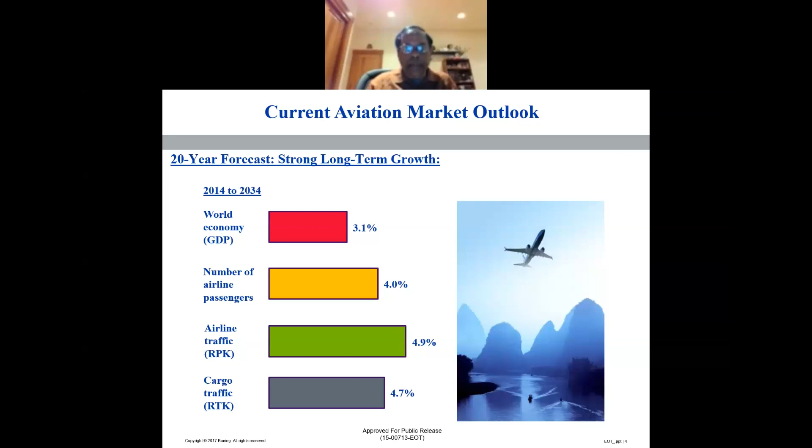So what do the market trends look like? The market trends basically are driven by the growth of emerging economies. You know, the current economy is not that strong, and because of that, you have seen how the airline industry was affected during the pandemic and is now gradually, slowly recovering. It is also a much more diverse and balanced market all over the world, like different countries have different requirements based on their own country's passenger demands.

And there also continue to be strong replacements when the aircraft are becoming too old. It's time to replace the aircraft, and then there are the new airplane capabilities, say for example, our 787-8, 9, and 10, and the new airplane that is coming, called the 777-8, 9, is coming maybe in 2024 that all the passengers will be flying. So this plane is under testing at this moment.

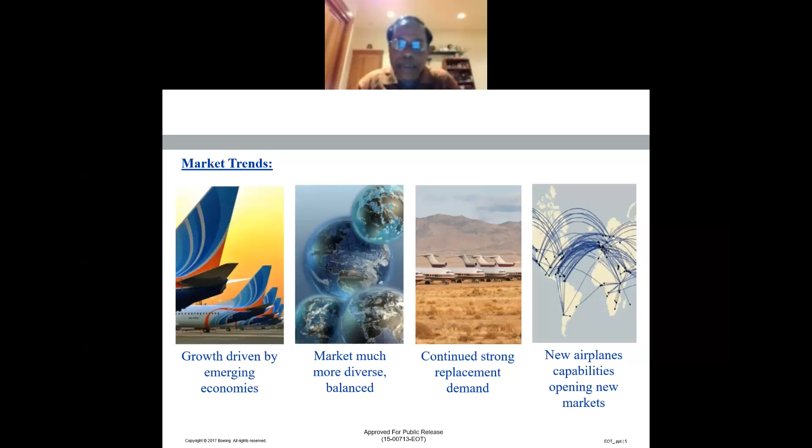So how does the fleet composition change in the next 20 years? As you could see from the pie chart from left to right, the regional jet is changing from 12 to 6%. Single aisle aircraft, as an example the 737 is the most popular, is moving from 65 to 70%. The small wide body is the 767 and also the 787 has some. The 787-8 is a small wide body that is moving from 11 to 13%, and the medium wide body is moving from 8 to 9%, and the very large aircraft like the Airbus A380 or our 747 is moving from 3 to 2%. So that's the next 20 years trend that has been forecast.

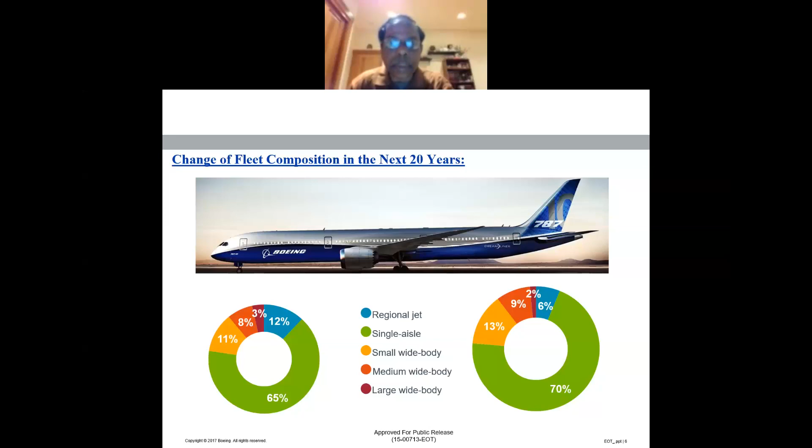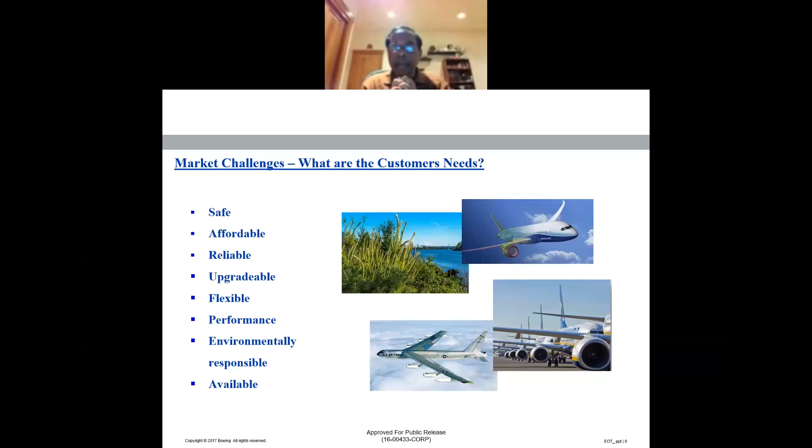So what are the technology and investment for future needs? So we are looking for extreme affordability, breakthrough performance, enduring sustainability, and being environmentally responsible. So that's the main focus of technology investments for the future.

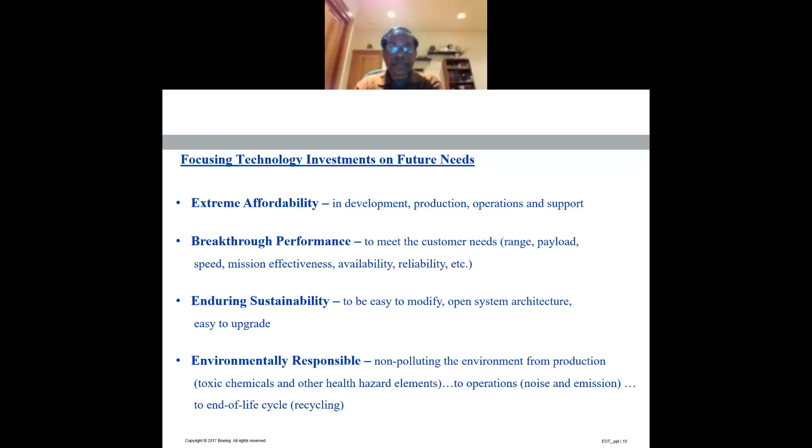So in this diagram, I'm going to show you what the major structural components look like. Those are all external shapes, like your fuselage, the body, the wing, and the stabilizers. And there are some under the undercarriage, there is a keel beam and the landing gear. Those are internally installed inside the aircraft. And on the wing, there's an engine and nacelle and pylon. And so those are the major components like your fuselage, wing, and stabilizer.

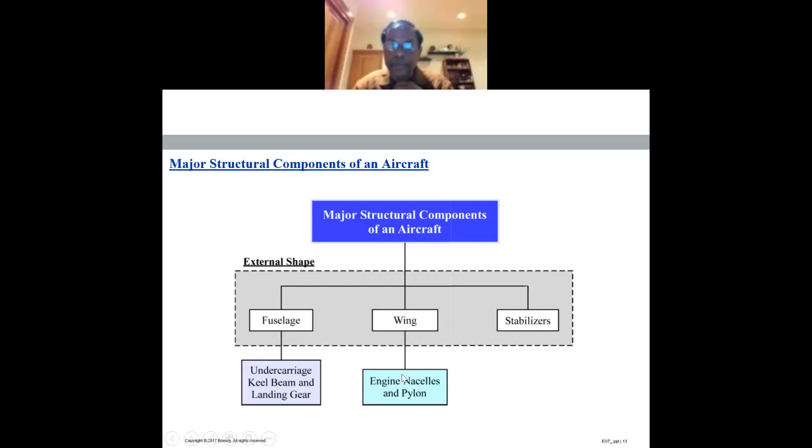So now I'm moving to the structural part of the fuselage section. As you could see on figure C, there's an example of an upper lobe of a section of a fuselage. So fuselage has three major components, like your skin, that's the skin, that's the stringers, which go along the length of the aircraft. The frame is a transverse component. As you could see, those are the frames.

And what are the input metals to manufacture those? The skin is made out of sheet or plate products, either bare aluminum or clad. The stringers are made out of sheet as well as extruded product. The frame is also made out of sheet product, like a plain sheet, then you form it into the shape and then you make the frame out of it. It could also be an extrusion product.

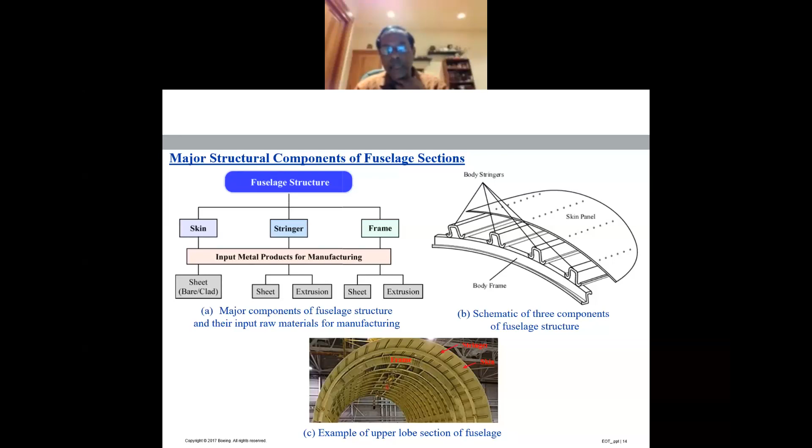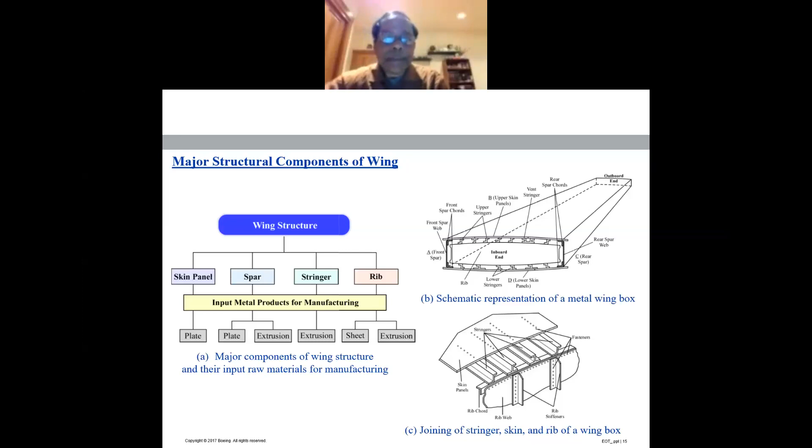So the major structural components for the wing are very similar. It has skin panels. As you could see, the upper part of the wing when you were flying in the aircraft, that is called the skin. Then the spars, this spar is called the front spar. In the back there is a rear spar. Let me see if I could minimize that one. So that's the rear spar and the front spar. And the stringers are going along the length of the wing. There is this called the rib, like our human body, we have ribs in our chest.

And then the input materials: the skins are made out of plate, spars are made out of plate and extrusions, stringers are made out of extrusions, and ribs are made out of sheet and extrusions. So those are the basic components of various aircraft parts as well as the raw materials used to make those components.

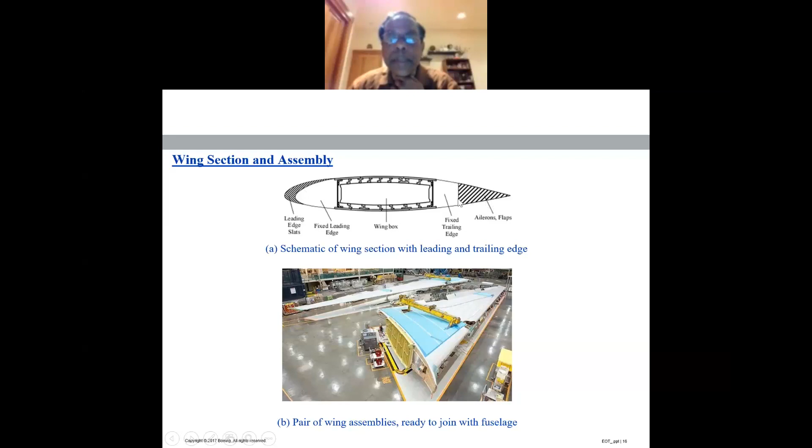Okay, so this slide is showing you a wing section assembly. As you could see, the top view shows the major components. The leading edge of this is called the slats, and this is called the leading edge. This is the trailing edge, and the main structural part of the wing is sitting in the middle. And so it has a fixed trailing edge and a movable trailing edge. And the bottom photograph is showing you the actual wing that will be attached to the fuselage later for a 777 aircraft. So ready to join.

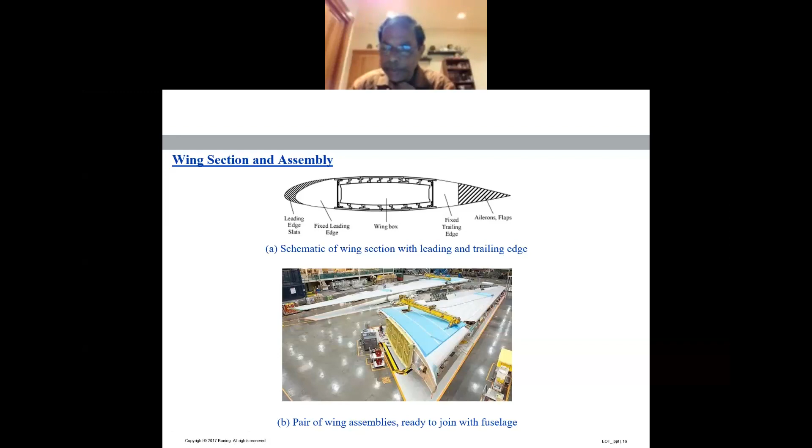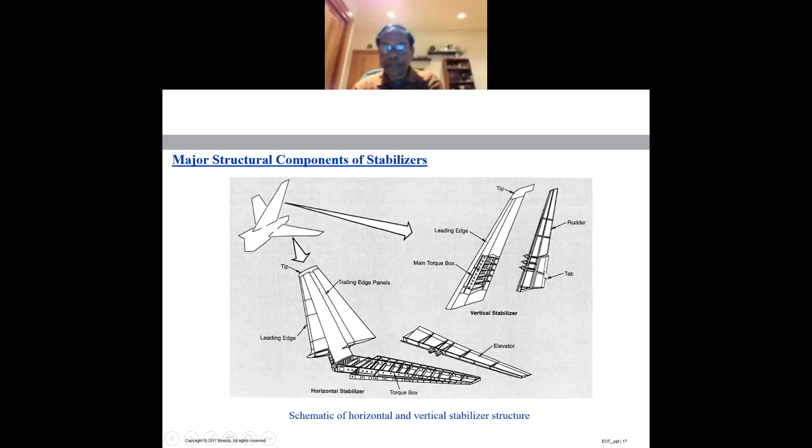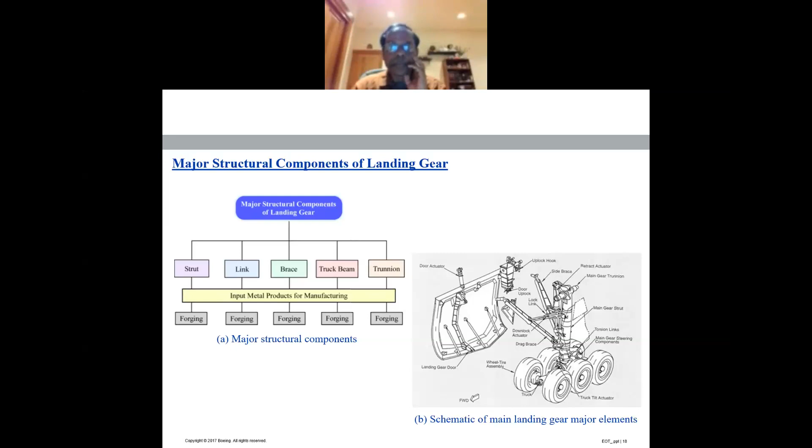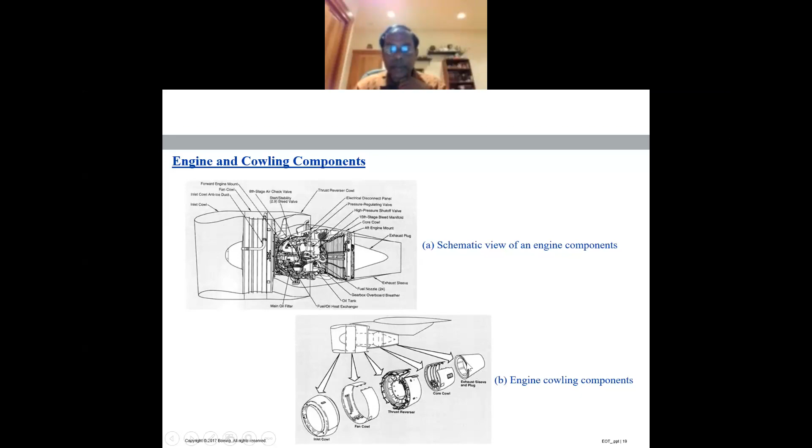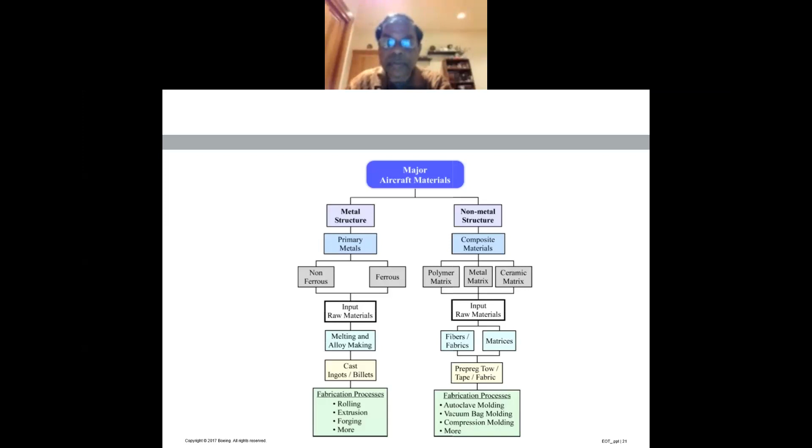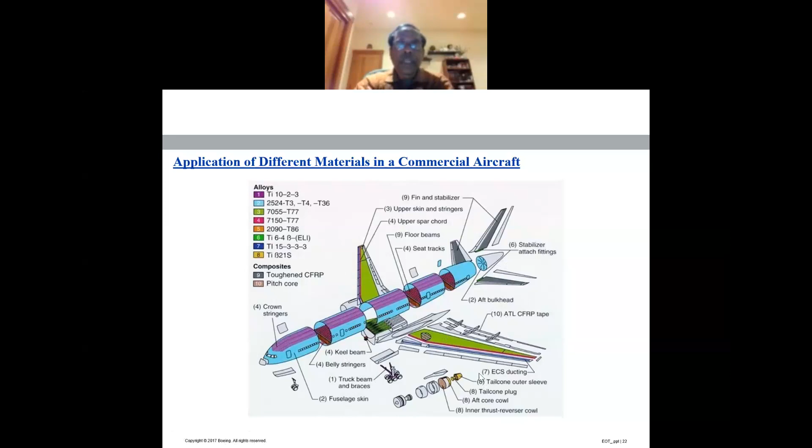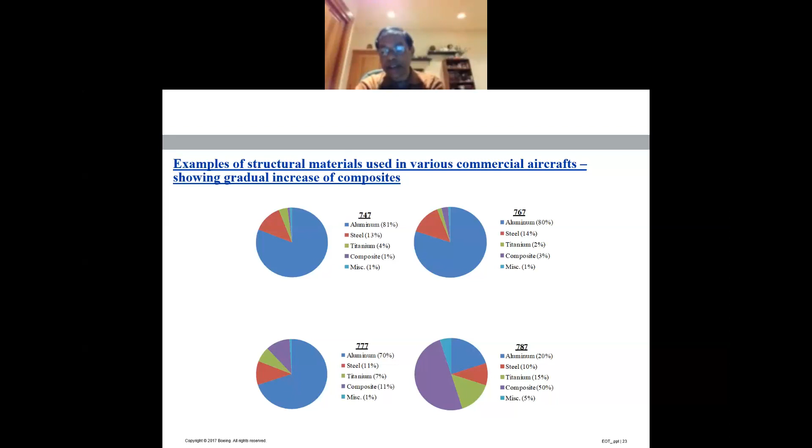Here is a pie chart example for military aircraft. For the F/A-18, composite was 10%. For the F/A-18E and F, composite was 19%. For the F-22, composite was 24%. Since composite is growing, titanium is growing too, because titanium is compatible with composite material. And when the F-35 came in, you can see composite increased to 40%.

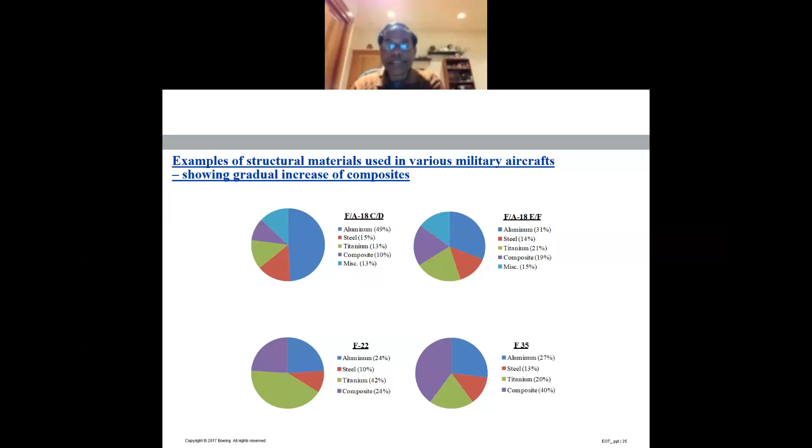Now I'm going to show you the uses of different materials, the wrought products: sheet or plate, extrusions, forging, and what percentage is used in the aircraft. As you can see on the top pie chart, 48% of the total material used is sheet and plate product, 24% is extruded product, 15% forging, and 13% other materials. The bottom figures show the fundamentals of rolling and sheet production, extrusion, and the forging process.

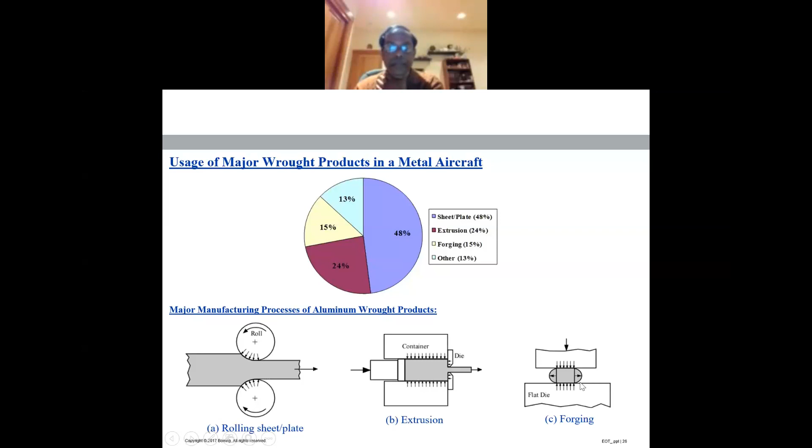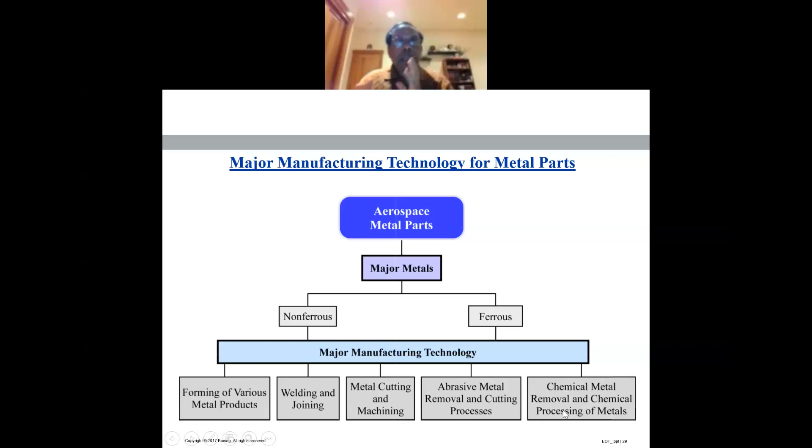So I'm going to show you just one quick slide on this one, that tribology is one of my research fields. My PhD work was on tribology, meaning friction, wear, and lubrication processes. Tribology's major components involve the rubbing between two metals, two surfaces.

So it deals with the surface topography, it deals with the friction and lubrication process between tool and workpiece, and during the friction and sliding process, the metals go into some wear process by abrasive wear or adhesive wear, and how the role of tribology is affecting our different processes.

Like your metal forming process is a friction control process. In welding technology, some welding technologies are friction stir welding or linear friction welding. Then in machining, there is frictional heat control, and in abrasive metal removal, a lot of things are done by the abrasive process, the abrasive materials and abrasive wheels that you are using to remove the materials.

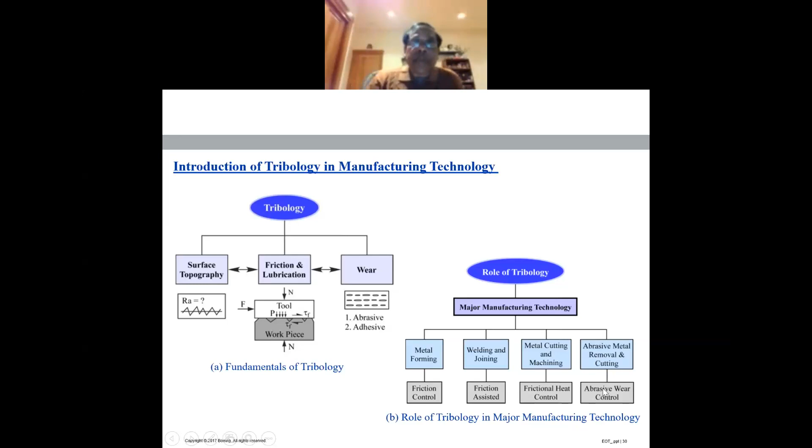So under the forming technology of various metals, there are different forming technologies. On the left-hand side, this figure is forming technology for sheet metal products. The sheet metal forming technologies are brake forming, bump forming, roll bending, stretch forming, hydropress forming, roll forming, joggle forming, deep draw hydroforming, match die forming, spin forming.

When I was in my master's program at Shibpur B.E. College, Professor Ranjit Ghosh was my professor teaching metal forming classes, and that is one of the most interesting areas. I learned it at B.E. College, and I'm still using it at the Boeing company. I'm basically a forming technology guy in the company, helping the company move forward in forming technology.

So now I'm moving to cold forming of the plate product. For plate products, bump forming technology is being used, shot peen forming technology, I'll talk about that a little bit, and laser shock peening technology is also being used to form the metal. Then on the extrusion side, there are stretch forming, roll contouring, and joggle forming.

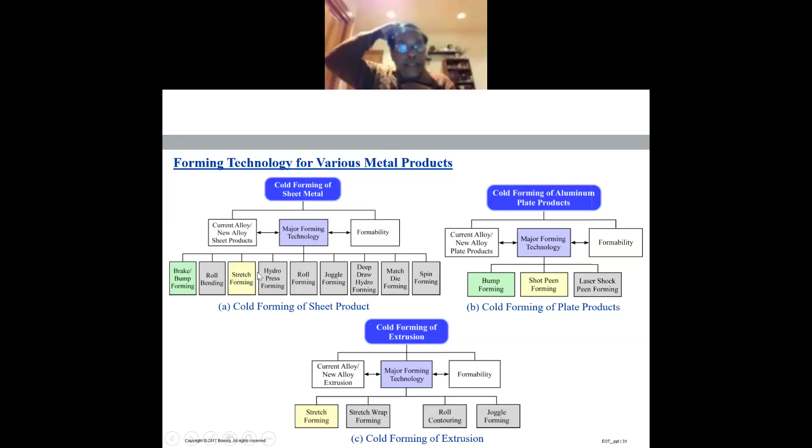Now moving to stretch forming. The left-hand figure shows a schematic of the fundamentals. Basically, there is a forming block, and a flat sheet is stretched by uniform tension by the hydraulic cylinders from left to right. The forming block moves up, bending the sheet and stretching it further beyond the yield point into plastic deformation. That's the fundamental of stretch forming.

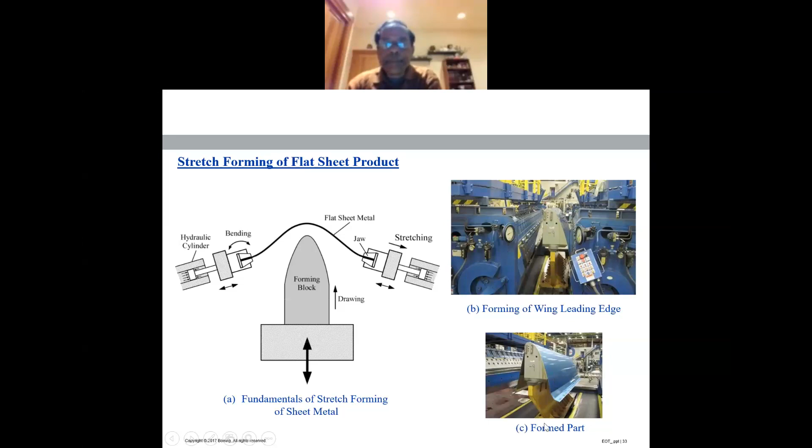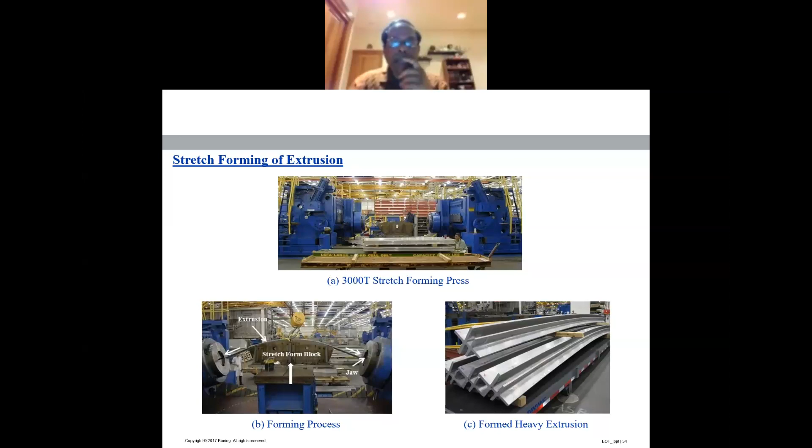So now I'm moving on. We talked so far about forming at ambient temperature, room temperature, which we call cold forming. Now I'm moving to the hot forming process. There are a few hot forming technologies being used: superplastic forming, hot die forming, hot brake forming, and hot stretch forming.

Under superplastic forming there's another process called diffusion bonding, where parts are diffusion bonded together, and then that sandwich diffusion bonded part is superplastically formed. There's also another forming process called creep age forming, where the material is brought to the aging temperature, and under that temperature some pressure is applied - either by vacuum bag or by an external applied load - and under the aging temperature the material is formed or straightened.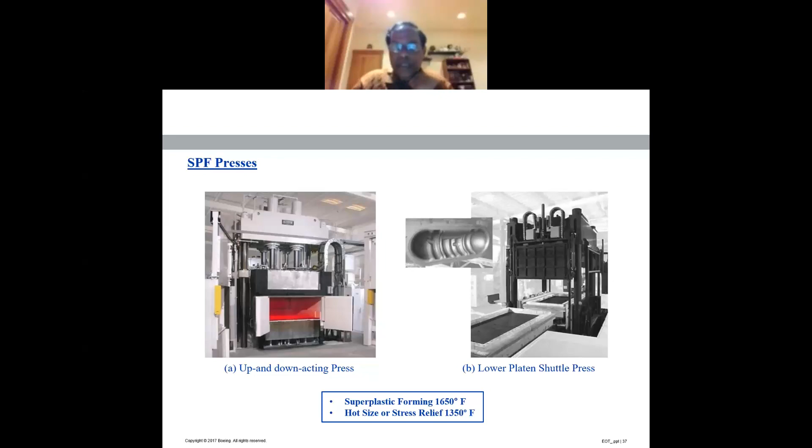After forming you need stress relieving operations to remove all internal stresses developed - the stress relieving temperature is typically 1350 degrees Fahrenheit. Here are a few examples of superplastic formed parts, 6-4 titanium sheet metal parts.

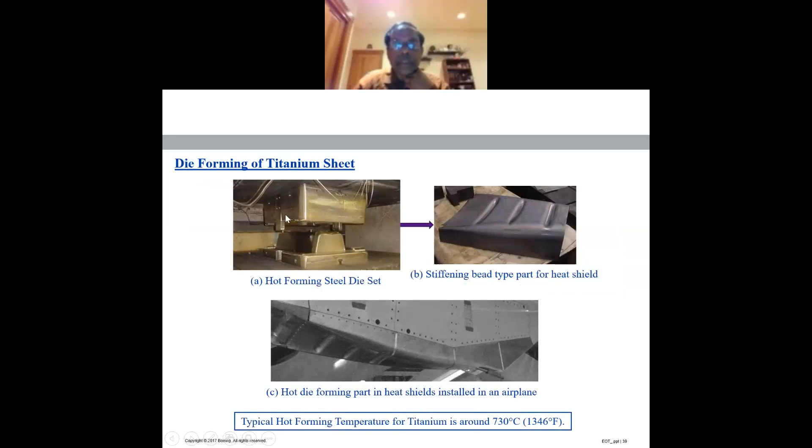As I mentioned, hot die forming is also another hot forming operation. That's a pretty heavy top and bottom die. Here's an example of the hot die forming process.

This is also a part of the heat shield components, as you can see here - I think it's for the 757, a very old aircraft. Typical hot forming temperature for titanium is 730 degrees centigrade, 1346 degrees Fahrenheit.

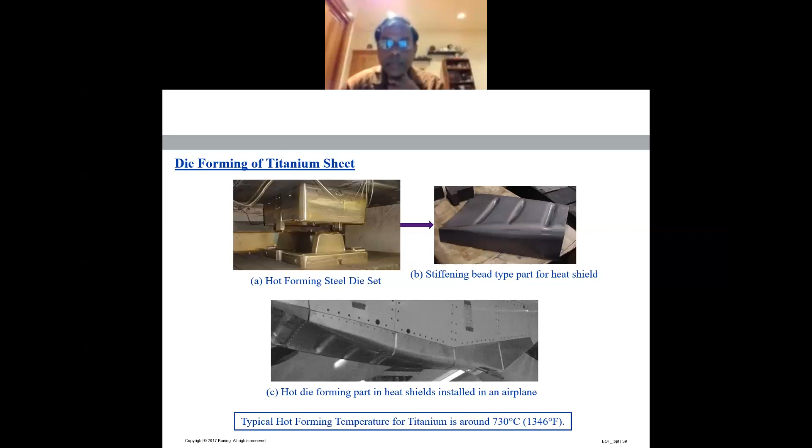So that's hot forming of a very heavy, thick plate. As you can see, this example is very hard to form if you don't use the hot forming process. It's titanium using a ceramic die, a low expense die. Since you're not making many plates of this form - this plate is for one of the military applications, and not many parts are produced - a ceramic die would be a less expensive process to use.

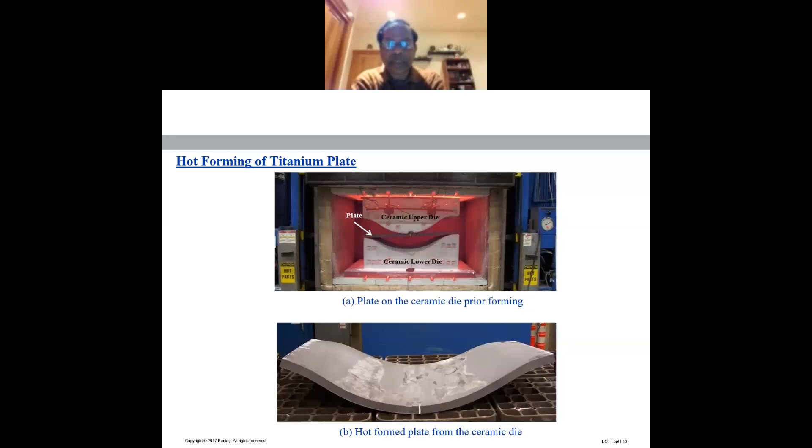Now moving to another technology called high energy forming and joining. There are two kinds of high energy forming. One is called explosive forming - these days we change the name to high energy hydroforming. And there's another technology called electromagnetic forming.

This is a schematic diagram showing the explosive forming. There's a die, and this is your blank. This is put in a vacuum bag and put into the water tank. The explosive is on top. That's the standoff distance between the explosive and the top of the metal surface. Then the explosive is ignited, and when ignited, it energizes the hydraulics, meaning the water, and the high energy hydraulic fluid pushes the metal. It's a very high strain rate deformation process, and it forms very fast and quickly to the curvature and contour of the die.

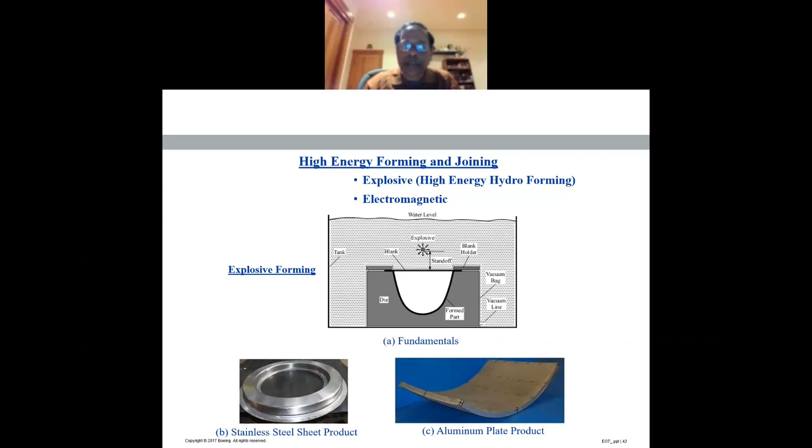So let me talk about electromagnetic forming. This is one of my very favorite technologies that I learned and applied, and I have done a lot of innovations in this technology for many aircraft.

This is an example I'm showing you where torque tubes are being used. The torque tubes drive the leading edge of the wing slat and the trailing edge of the wing flaps. When the airplane is taking off, you're extending the flap, and also when it's landing, you're extending the flap further out, and you're also changing the angle of the leading edge. So how do you do that? You need to use some torsional tube to drive the flaps.

When you make the torsional tubes, those are made by joining a hollow, seamless tube. Those are extruded drawn tubes, aluminum 2024, attached to the end fitting at the end like this, and that is formed by electromagnetic forming. This is a schematic diagram of electromagnetic forming.

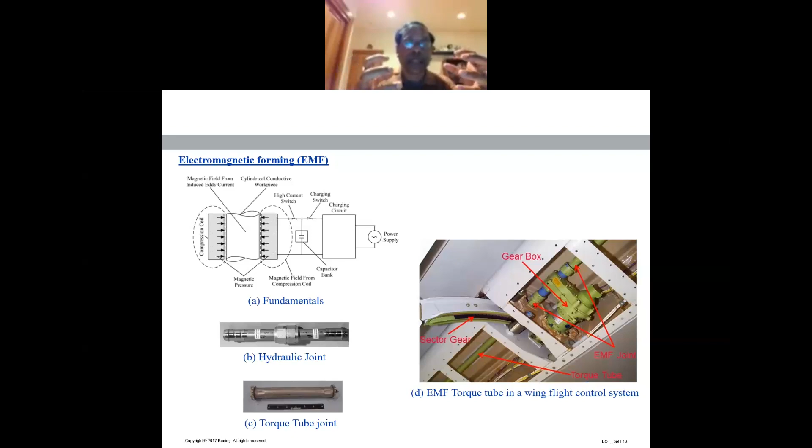Basically you have the magnetic coil, with the workpiece in between. When you discharge the current, eddy currents are induced, and because of that eddy current, two different directions of forces come in - there's a huge amount of compressive force coming in to collapse the tube into the end fitting to form the part.

So what are the applications, and what forming technologies are being used? There are bending processes, forming processes, swaging processes, and some transition forming processes. Under bending, there's stretching, draw press, compression, and roll forming. There's bulge forming, pull-out process, and beading technology. Under swaging, there's axial swaging, radial swaging, roller swaging, and elastomeric processes. There are various technologies - here are a few examples.

That's an example of bulge forming. Basically you apply some internal hydraulic pressure and localize it into the die, put some die in front of it, and do some bulge forming. There's another axial bulge formed part. There's an example of a rotary swage part over here, and the top view shows the bending of different tubes, which are finally joined by welding technology.

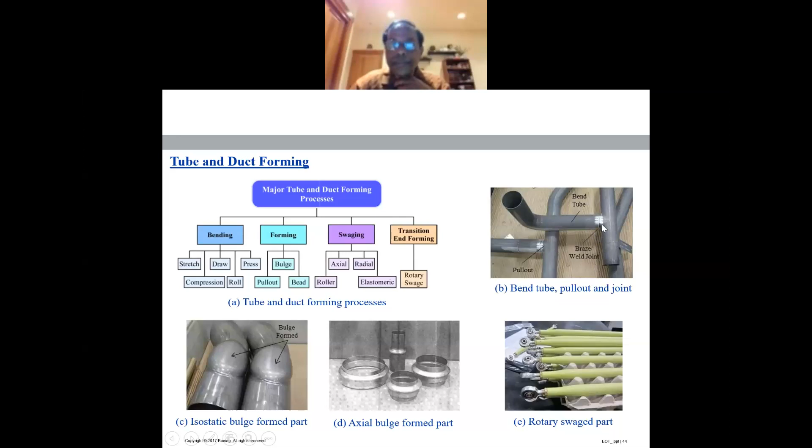Now let's move to welding technology. We have a few examples of welding - not that many welded parts are being used. Some welding technologies are used during the fabrication process, and afterward the welded section is removed and cut out to finish the part.

Friction assisted welding, as I mentioned earlier, includes linear friction, rotary friction, and friction stir welding. There are also standard welding processes done by electron beam, laser technology, TIG process, and MIG welding process.

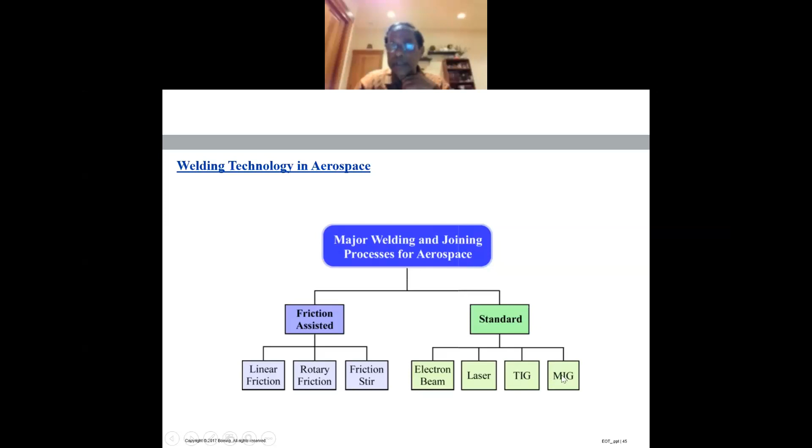That's a fundamental of rotary friction welding. As you can see, the part is rotating with very high speed, and while it is rotating, you are applying pressure, joining together under the pressure and the heat generated to bring the metal into the fusion stage.

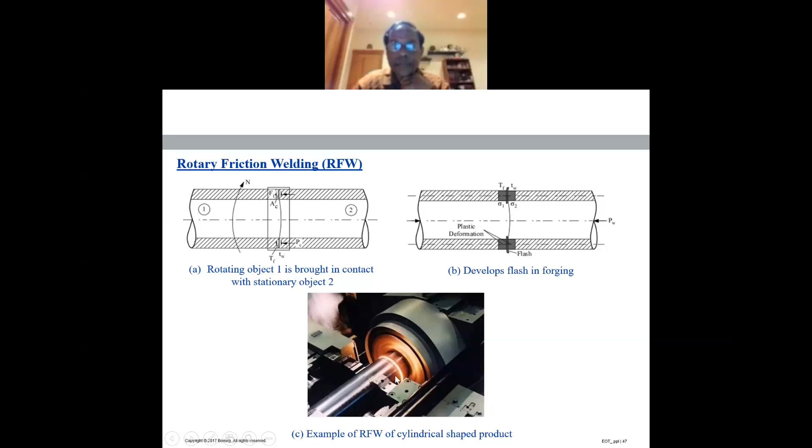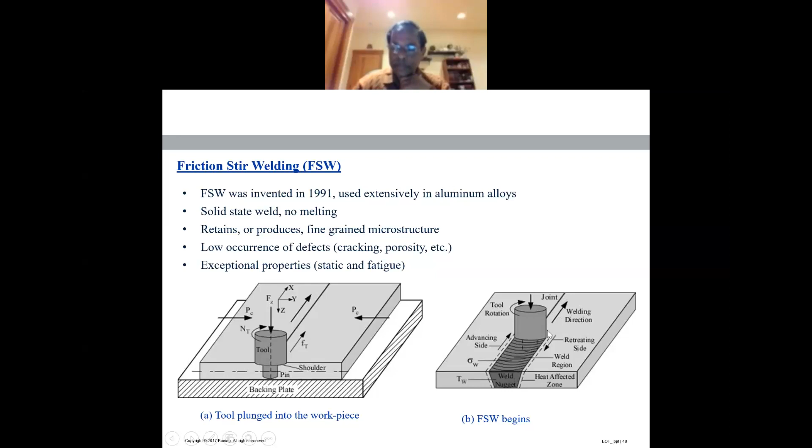So here's an example of a friction stir weld. As you can see, there is a friction stir weld joint in between this part. This part is not a structural part. We can easily apply this to aircraft for some container type applications.

Some fuel dams are also being used this way. There is no harm in having a friction stir weld joint in between.

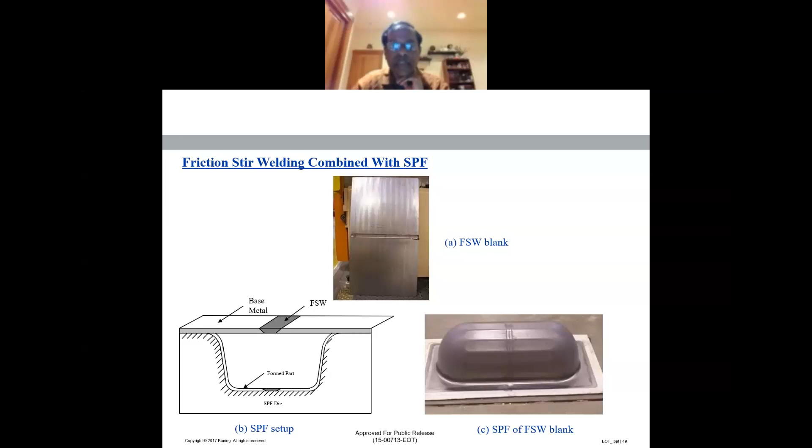But some of the parts are like this part I'm showing you, that I was involved in this lip skin development many years ago. This is the 787 lip skin. We were trying to develop it with titanium, although it was not used in the aircraft, but the technology is still valid for some future applications.

So when we did that, we had to prepare the blank before doing the plastic forming. We had to join a two-sheet blank by friction stir welding.

There are some welding joints over here, and I think there are 4 joints. The 4 joints will be split into 4 parts and finally fastened together as an engine lip skin. That's why we are not keeping the friction stir weld in the flyaway part. We are actually separating it out at the end of the forming and manufacturing process.

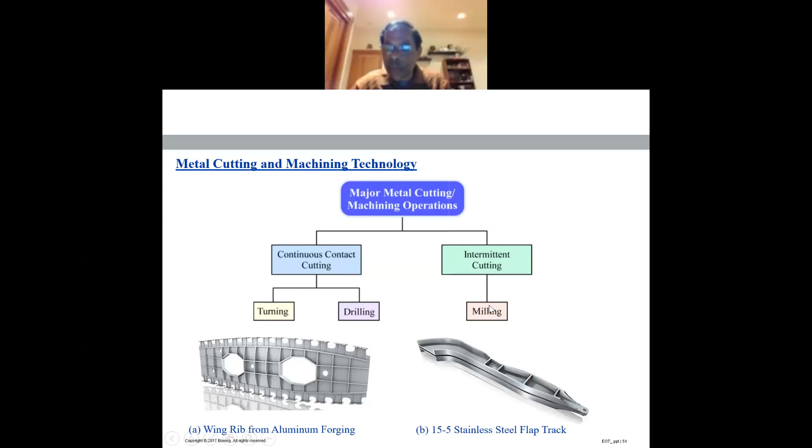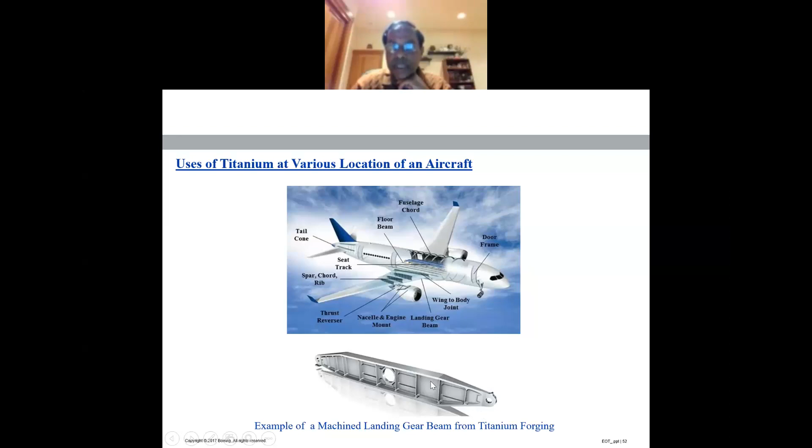I mentioned earlier that there are a lot of forging components in the landing gear area. Here is an example of the machining components on the wing.

There are a lot of monolithic parts that we developed and are using in the aircraft. On the left hand side, you can see the old configuration where sheet metal parts are fastened and joined together to make this. Then we converted it into a one-piece hog-out machined monolithic part.

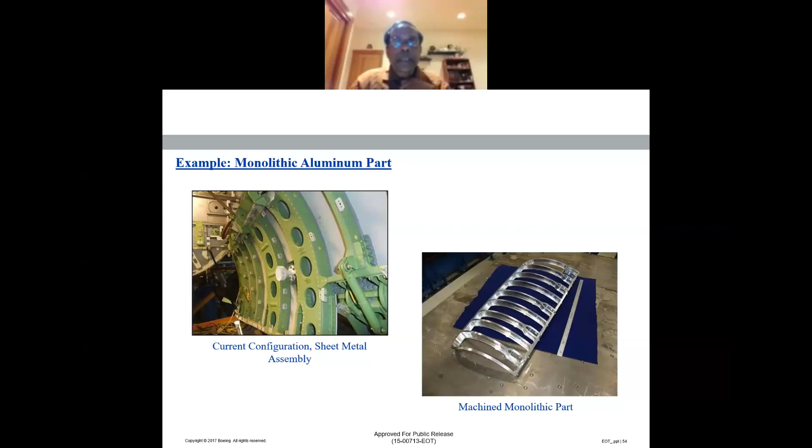As I mentioned earlier about tribology, that abrasive and frictional technology is how it is being used. So we polish many metal parts, right? And we debur the edge of the part when you shear off some sheet or plate components.

So how are we doing that? We are using grinding and polishing operations, right? So this is the fundamental.

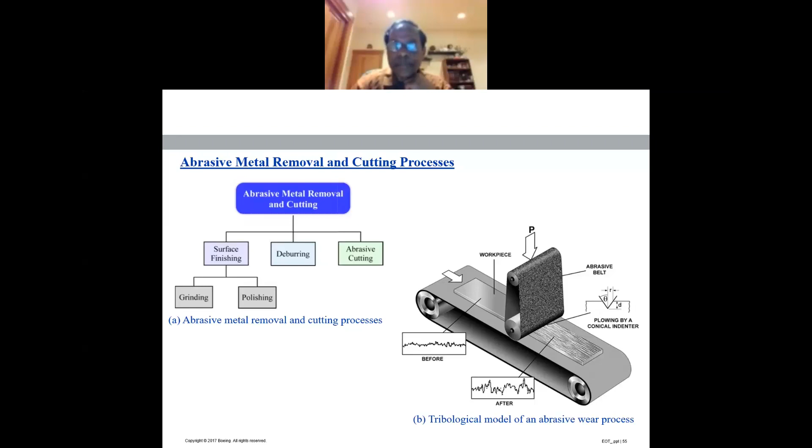Your surface finish of this metal part: the before is this, after is this. The surface topography is changing. Basically, it's a plowing process. Abrasive is trying to plow the material from one to other directions. That's the fundamental.

So here's an example of this abrasive process, using the belt sanding process to polish turbine blades. So this is what the turbine blade looks like before polishing and after polishing. This is a turbine blade formed and machined. There are a lot of machining lines you can see, and after polishing with the belt sanding machines, you can see the nice, good surface finish of the turbine blade.

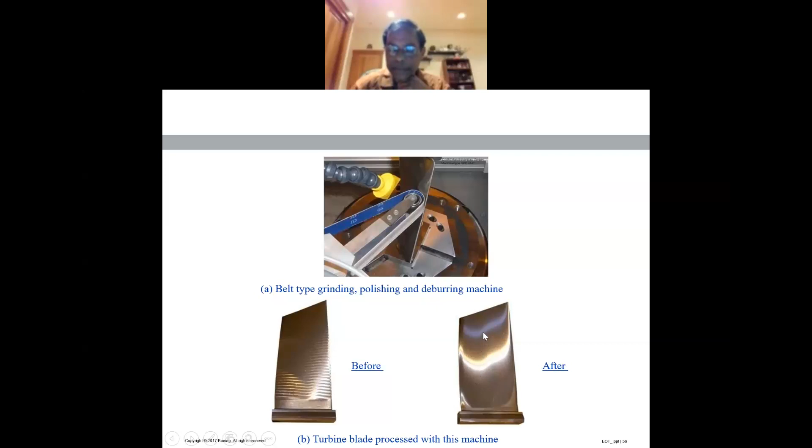There's another technology being used, called the abrasive water jet process. We normally use it to cut heavy metal. As you can see, this is an example of the water jet cutting machines being used over here. After we receive a big chunk of metal plate, titanium plate, from a supplier, we use abrasive water jet technology and cut it into the geometry of the part before you take it to the next operation of the manufacturing processes.

Before the abrasive water jet was developed, you had to use either a saw or your regular machining process to cut out the whole areas. It's a very time-consuming process and very expensive to do.

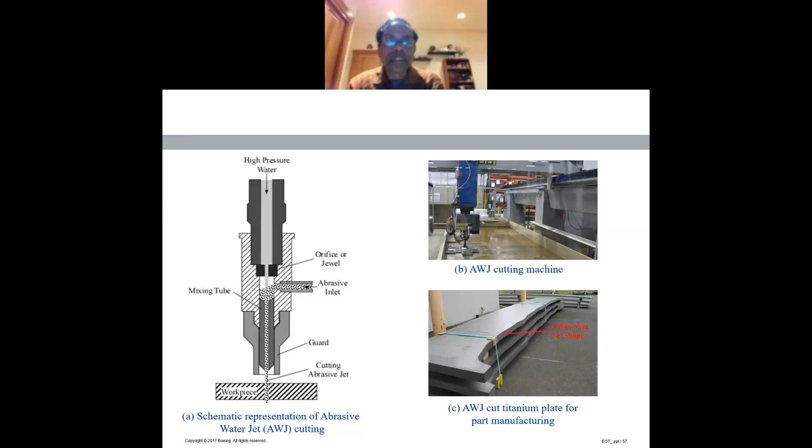Let's move to the chemical metal removal process. In chemical metal removal, we use a lot of chemical milling and chemical cleaning, but we are stopping the chemical milling process. Boeing has stopped the whole chemical milling process internally. When I joined 25 years ago, I saw a lot of chemical processes done internally.

I should mention that we manufacture parts not only within the Boeing company, but we have thousands of suppliers all over the world. They are making parts for us, and all are qualified by our qualified subject matter experts. They qualify the parts before they accept them for the aircraft. So all those technologies I talked about, the suppliers have those technologies. They are making the parts for us.

Since the chemical milling process is environmentally not good, Boeing, for safety reasons, has stopped it internally, but some suppliers in other countries still use it. For chemical milling, I'll show you some examples next. What's the application of chemical milling?

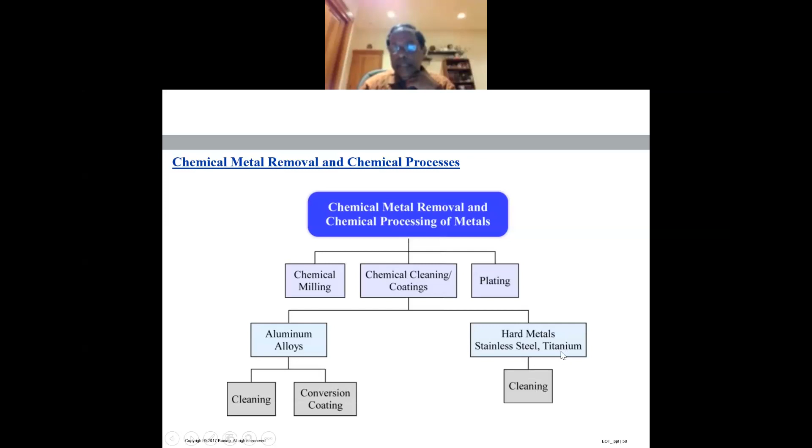After machining and forming, the part has to go through a lot of cleaning processes because of the dirt and oils and other things used on the surface. Then it goes to cleaning, then conversion coating, which we call alodine or anodize, to make it an environmentally protected surface before it is painted. There are a lot of hard metal coatings also being deposited on steel and titanium surfaces, and those steel and titanium surfaces also go through some chemical cleaning processes.

But these days, for your information, a lot of machines have been developed, mainly in Japan and also in Europe. The panels are taken to the machines, and the same operation is performed as a machining operation. So it's an environmentally nice and green process.

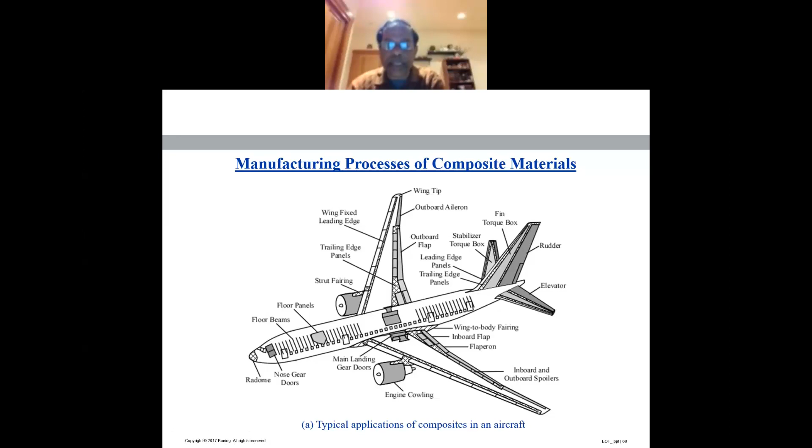The major manufacturing technology is prepreg layup, either hand or machine layup. In machine layup, there are the filament winding process, tape lamination, fiber placement, and drape forming. Liquid composite molding includes resin transfer molding, the resin film infusion process, and the pultrusion process.

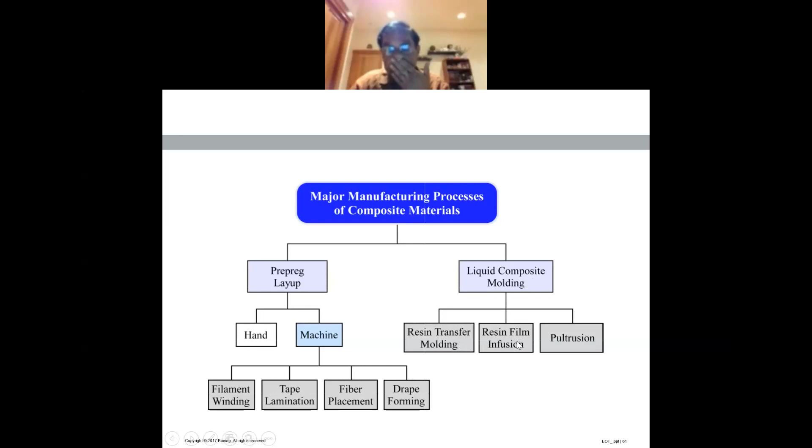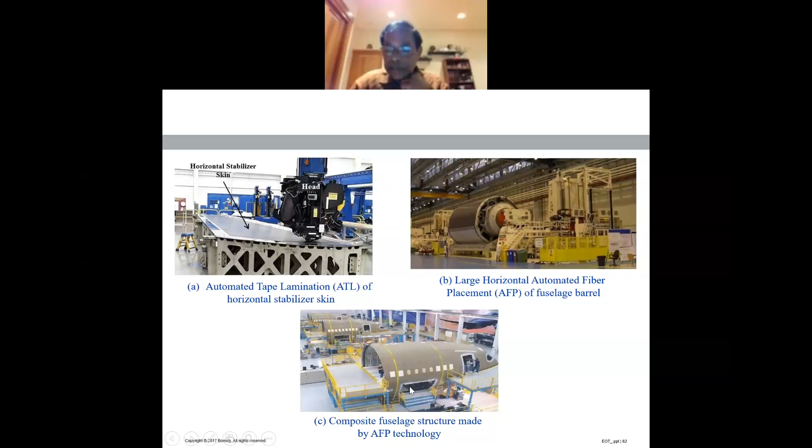So I'm moving to the measurement and inspection methods. When you do any manufacturing, either a small part or a large part, measurement and inspection is a very, very critical thing in manufacturing, because all the parts are very precise, very high tolerance parts, because all the parts have to be fitted and joined into the aircraft. There are millions of parts in the whole aircraft, and thousands of manufacturing companies are making them. The parts are coming to the assembly line. The parts have to be dead accurate to assemble. So that's why inspection and measurements are very, very critical.

So how are the measurements coming into that? There are many different measurement technologies: your manual type, your computer assisted type, your machine driven like a CMM, your hand driven devices. I'm sorry, under the manual bench, we are using the measurement tools, the standard functional gauges, functional check fixture. On the computer assisted side, we are using a CMM process. We are also using hand driven or guided technology, and non-guided technology.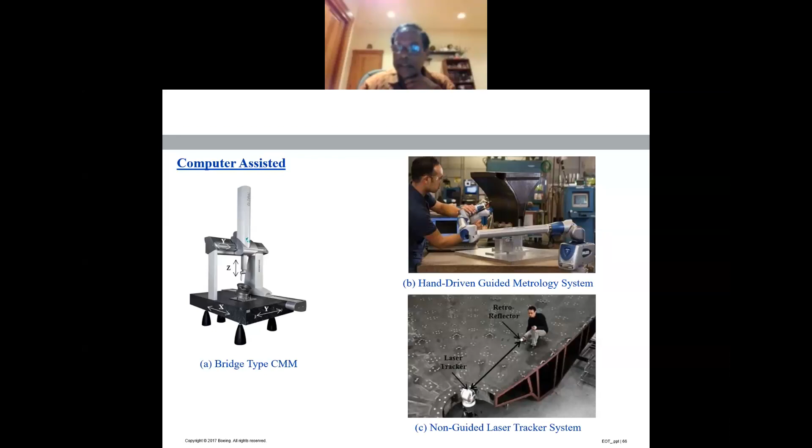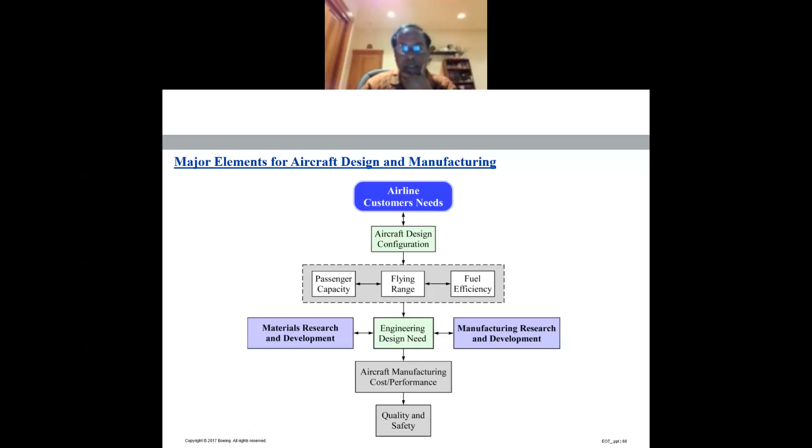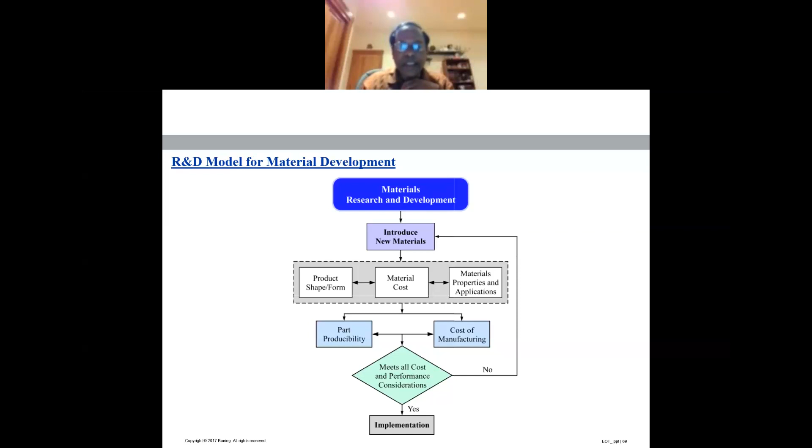I developed one technology, electromagnetic forming technology, formed in T3 condition and finally heat treated to T81. And that technology was kept in the Boeing library system for a while. After 3 years, the engineering department called me: Pradip, I need your help, we are going to implement this technology on the aircraft. So that's the way research and technology works. Many works are done, and from time to time, the technology is used in the aircraft. This is my manufacturing R&D model.

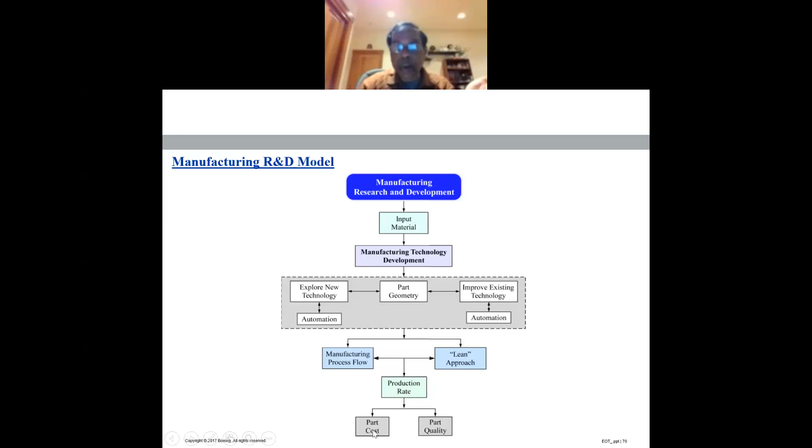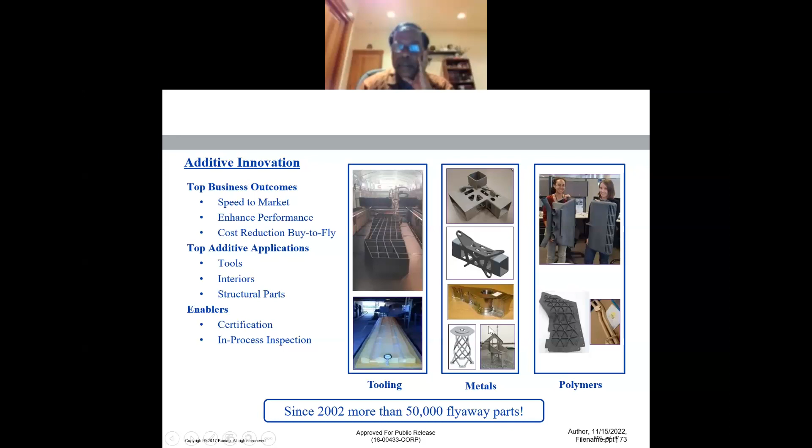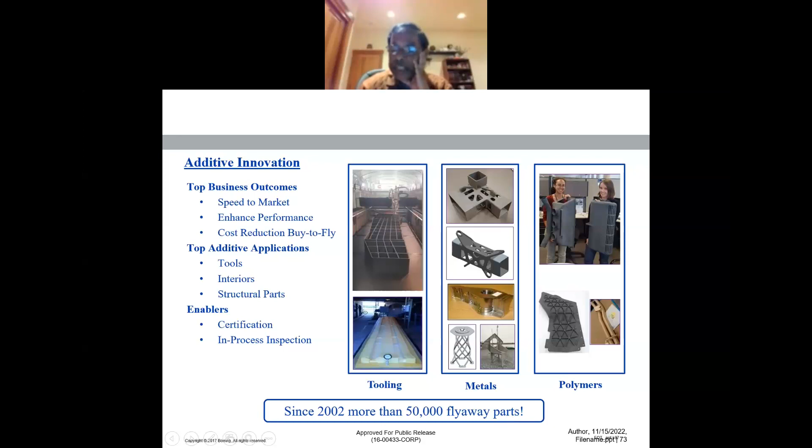The tool could be a plastic or some composite materials. Some metal parts are also tried out. As you could see, some polymers, some examples. Since 2002, more than 50,000 flyaway parts have been made by additive manufacturing technology. Mostly those are non-structural parts. There are a few additive manufacturing technologies being used, wire feed deposition, powder feed deposition.

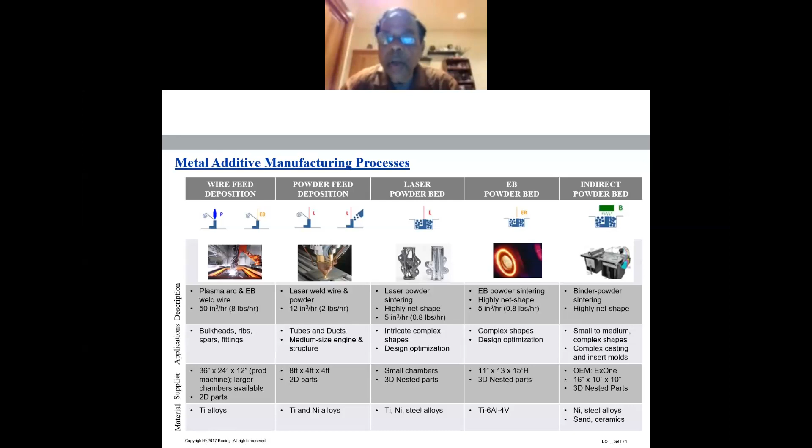Timeout. I'm sorry? May run into WebEx timeout. Oh, okay. So how many more minutes do I have? I think in a couple of minutes possible. Okay, I think it's done. Very good. Thank you.

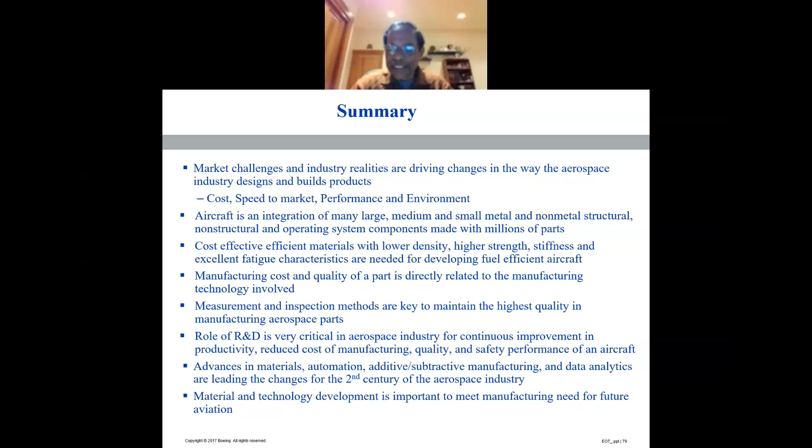Thank you, Dr. Saha. Am I audible? Thank you, Dr. Saha, for a nice presentation covering all aspects of aircraft manufacturing, considering the material development using advanced materials, also the basic and fundamental manufacturing processes covering forging, rolling, extrusions, conventional and non-conventional manufacturing, additive manufacturing, also joining processes such as welding, friction stir welding, etc. Also super finishing operations.

As an alumni, I feel proud to say Dr. Pradip Saha, our Pradip Da, for his research work on the development of aircraft components through innovative research and working at such a prestigious organization like Boeing, which is our dream. Dr. Saha, I have two questions. Am I audible? Sure. Yeah.

Can you hear me? We know from our childhood that aluminum is basically used for aircraft components as a lightweight material. And so reduction of the weight to volume ratio is of prime importance, I think. And today we have nano composite materials, carbon nanotubes. Can you throw light on their application in aircraft components? Yeah, so the nano, like I'm not really a composite guy working for Boeing. I know composite technology. I did it in my PhD program, some coursework.